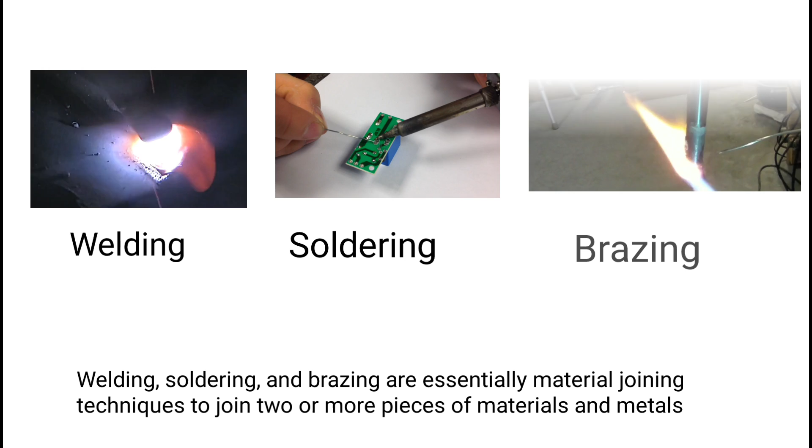To effectively join parts together, a welder will either solder, braze, or weld the two materials, which are processes that use heat. Welding, soldering, and brazing are essentially material joining techniques to join two or more pieces of materials and metals. They are also techniques used for filling gaps in metal parts. While these three methods have a lot in common, there are distinct differences that are important to know.

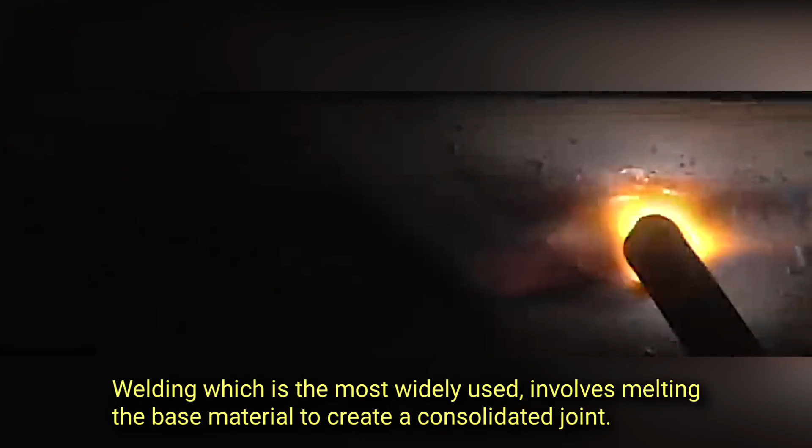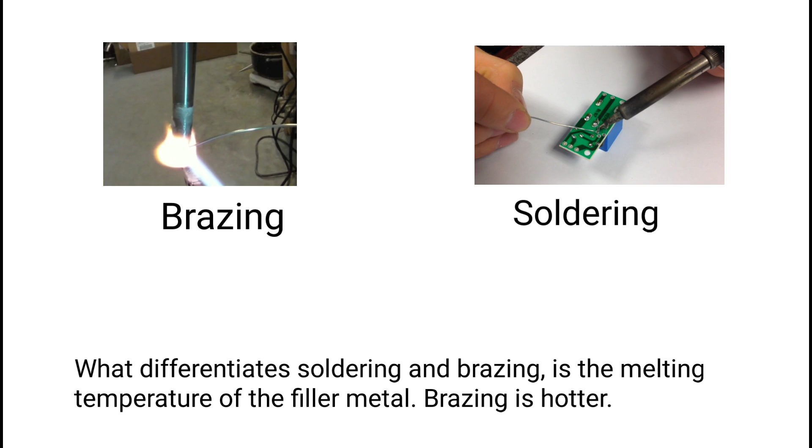Welding, which is the most widely used, involves melting of the base material to create a consolidated joint. It may or may not involve the use of filler metals or shielding gases. Brazing and soldering are almost the same, in that they both melt the filler metal, braze or solder, only, and not the base material. What differentiates soldering and brazing is the melting temperature of the filler metal. Brazing is hotter. These three joining techniques have their advantages and disadvantages from a processing and application perspective.

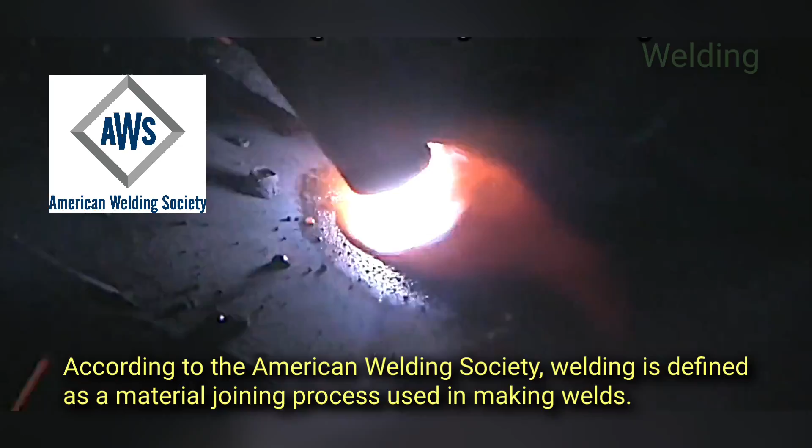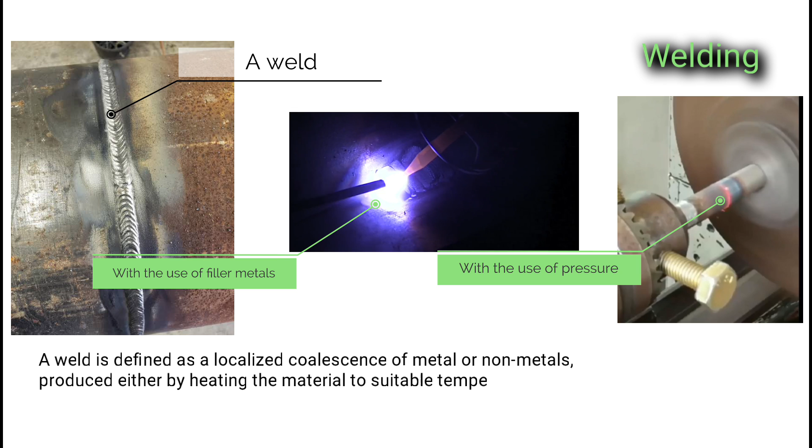Welding. According to the American Welding Society, welding is defined as a material joining process used in making welds. A weld is defined as a localized coalescence of metal or non-metal, produced either by heating the material to suitable temperatures, with or without application of pressure, and with or without the use of filler metals.

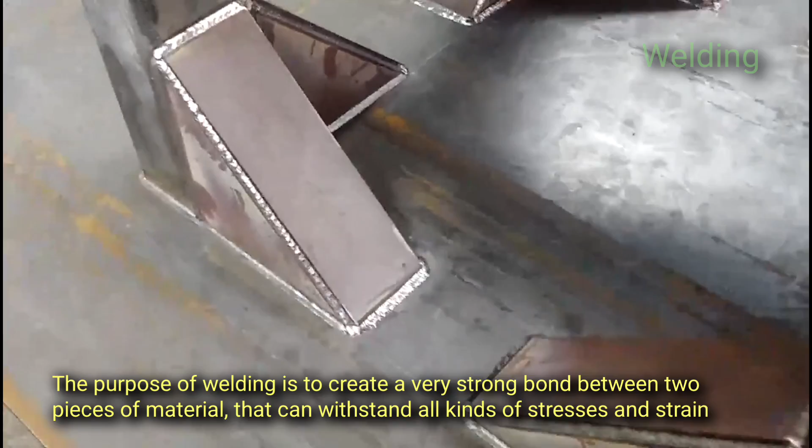The purpose of welding is to create a very strong bond between two pieces of material that can withstand all kinds of stresses and strains, such as supporting the body of a car or aircraft fuselage. Welded components are in use all around us in everyday life.

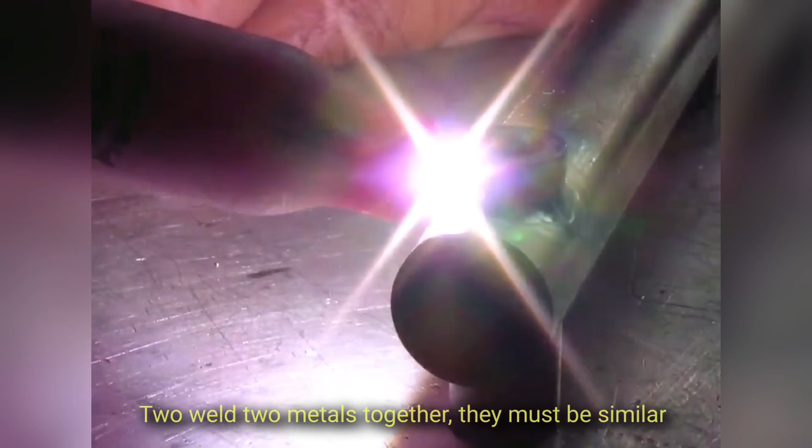To weld two metals together, they must be similar. For example, in most welding processes you cannot weld aluminum and steel together because of their different thermal expansion coefficient and melting point. The welding temperature must be high to join two pieces together, yet not too high, as this can change the characteristic of the metal and cause the weld to weaken.

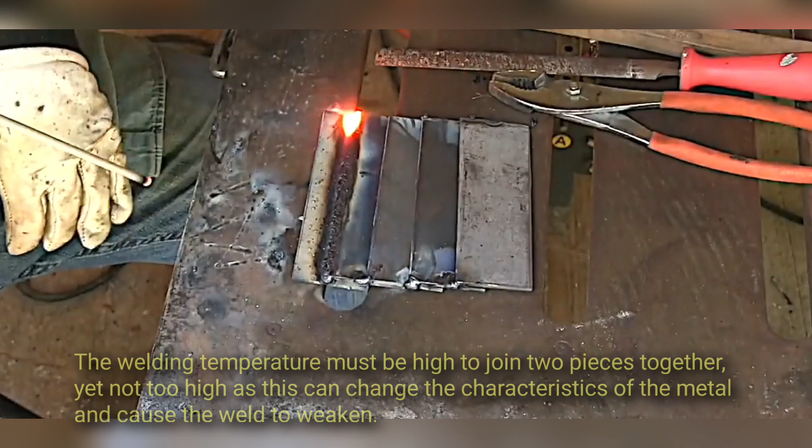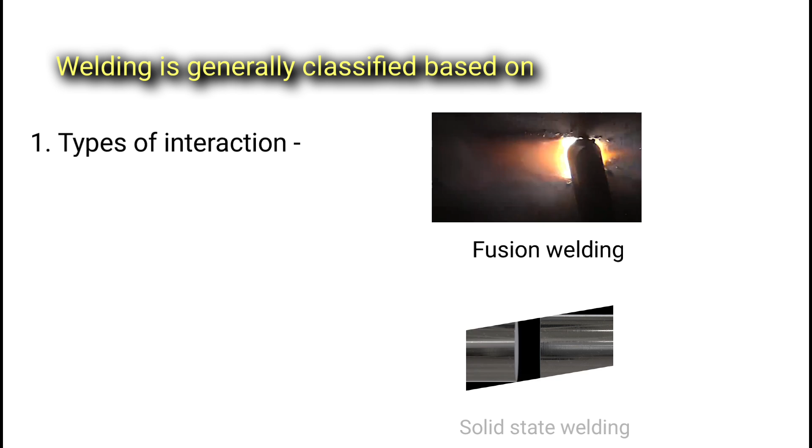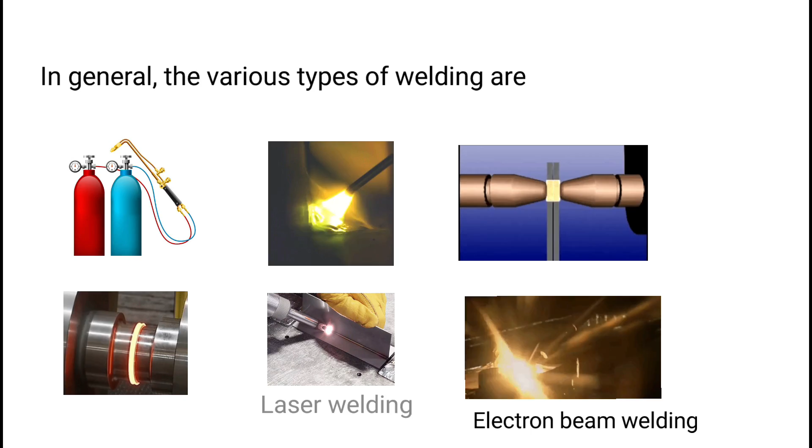There are different types of welding techniques to use depending on the material and the desired outcome. Welding is generally classified based on: 1. Types of interaction, that is, fusion welding or solid-state welding. 2. Source of heat, that is, oxyacetylene gases, lasers, electricity, etc. In general, the various types of welding are gas welding, arc welding, resistance welding, friction welding, laser welding, electron beam welding, etc.

Advantages of welding: 1. Produces stronger joints than brazing or soldering. 2. A good weld is as strong as the base material. 3. Able to join thin and thick sections of metal, depending on the process type.

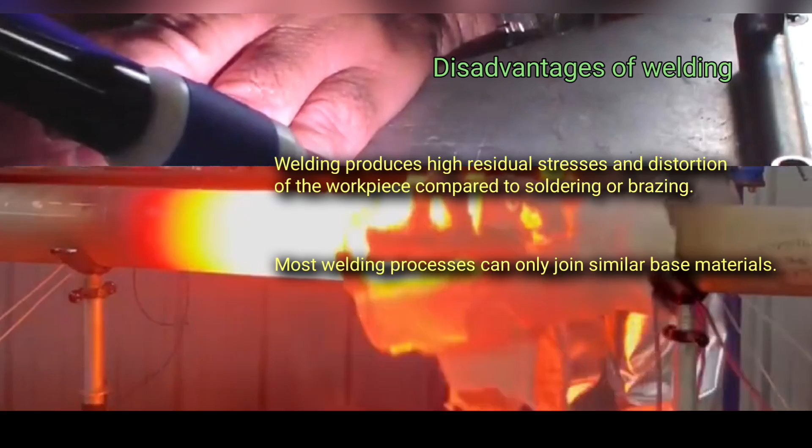Disadvantages of welding: 1. Welding produces high residual stresses and distortion of the workpiece compared to soldering or brazing. 2. Most welding processes can only join similar base materials. 3. Welding joint requires stress relief heat treatment.

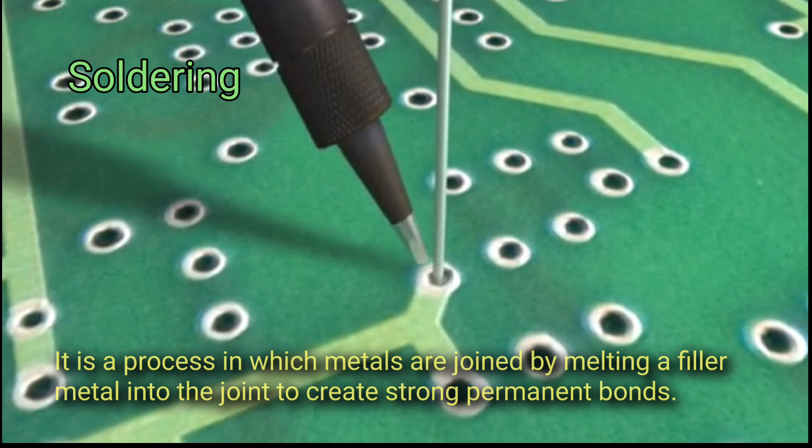Soldering. Soldering is one of the oldest and most popular methods used for joining similar or dissimilar materials. It is a process in which metals are joined by melting a filler metal into the joint to create strong permanent bonds. It is similar to brazing, which uses filler alloys, but it is done at a low temperature below 450 degrees Celsius. Like brazing, soldering uses flux to clean the metal surfaces, allowing easier flow of the liquid filler metal over the base materials, which improves its mechanical properties.

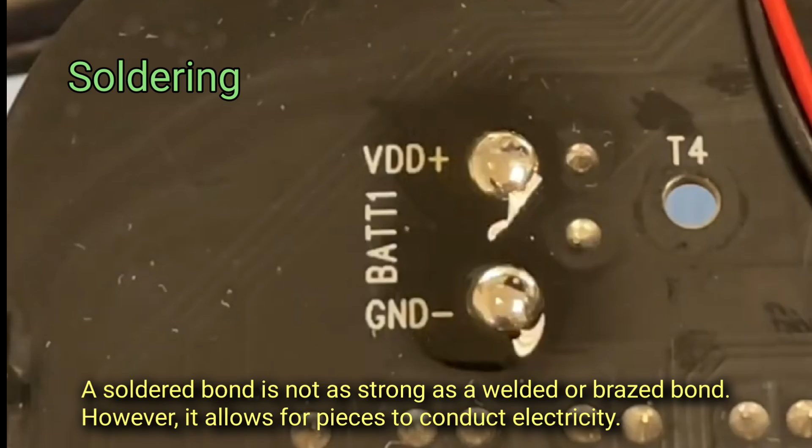Base materials that are suitable for joining by soldering include brass, copper, iron, gold, silver, etc. A soldered bond is not as strong as a welded or brazed bond. However, it allows for pieces to conduct electricity. Therefore, it is widely used in the electronic industry for making electrical connections, such as joining copper to printed circuit boards. Soldering alloys are usually identified by their major alloying element.

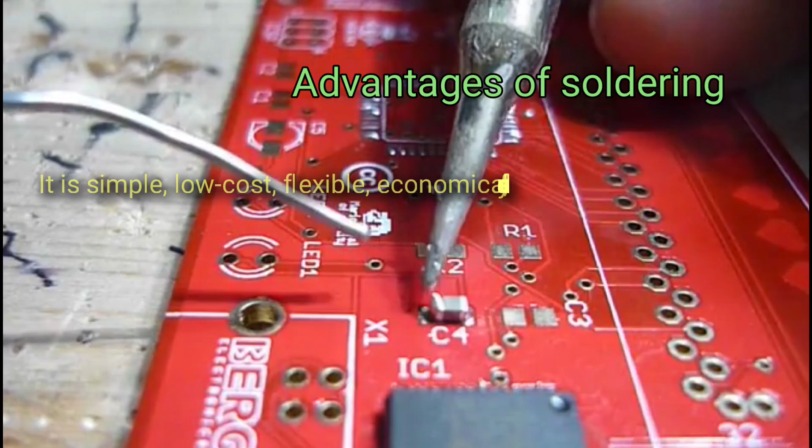Advantages of soldering: 1. It is simple, low cost, flexible, economical, and user-friendly. 2. Having a lower input and processing temperature compared to welding and brazing. 3. Dissimilar material can be joined.

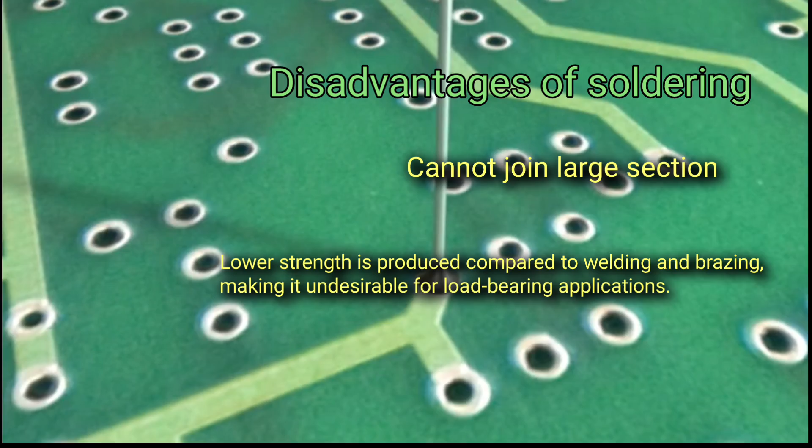Disadvantages of soldering: 1. Cannot join large sections. 2. Lower strength is produced compared to welding and brazing, making it undesirable for load-bearing applications. 3. High chances of the flux containing toxic components.

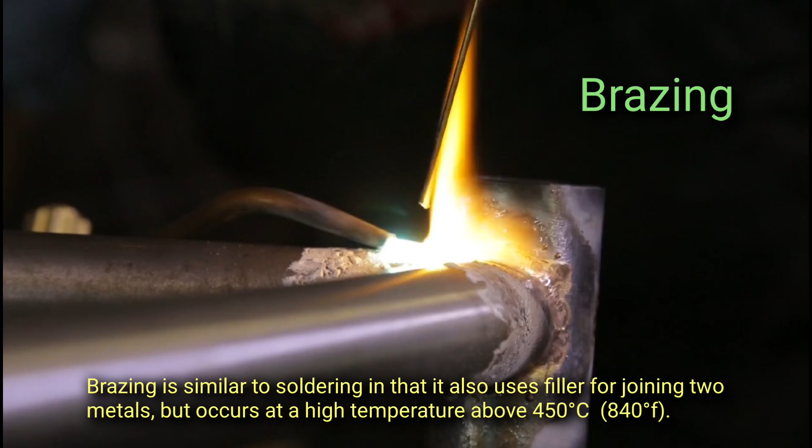Brazing. Brazing is similar to soldering in that it also uses filler for joining two metals, but occurs at a high temperature above 450 degrees Celsius. It is a process in which materials are joined by melting a filler metal into the joint to create strong permanent bonds. It can be applied to a wide variety of materials, including metals, ceramics, glasses, plastics, and composite materials.

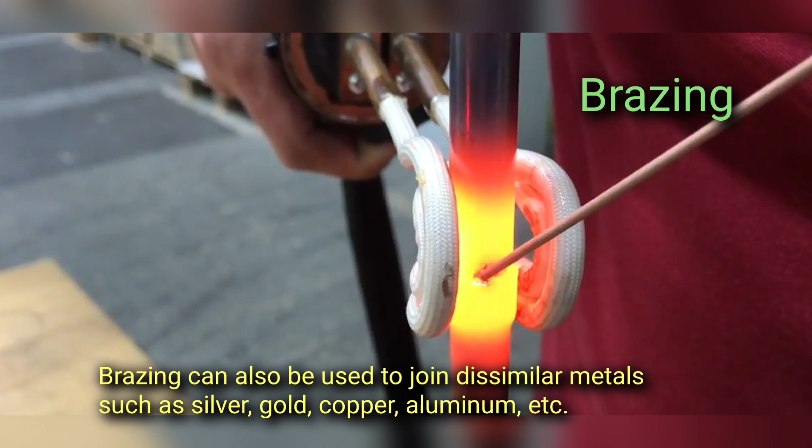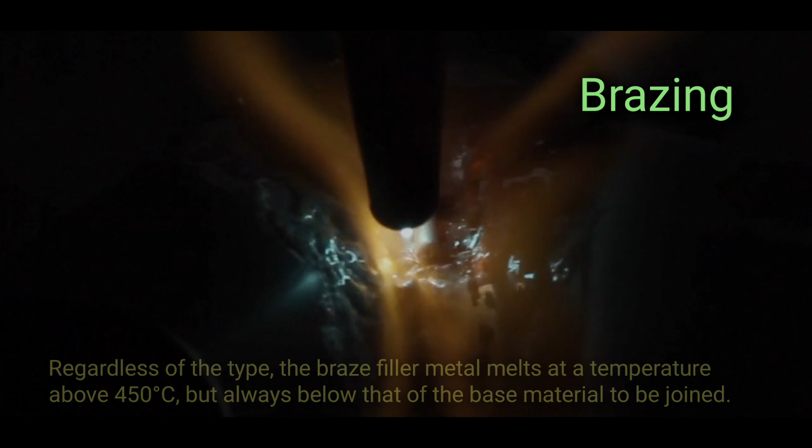Brazing can also be used to join dissimilar metals such as silver, gold, copper, aluminum, etc. Regardless of the type, the braze filler metal melts at a temperature above 450 degrees Celsius, but always below that of the base material to be joined. Brazing requires a small joint spacing to allow capillary actions to draw the filler metal into the joint when the parts reach the proper braze temperature above 450 degrees Celsius.

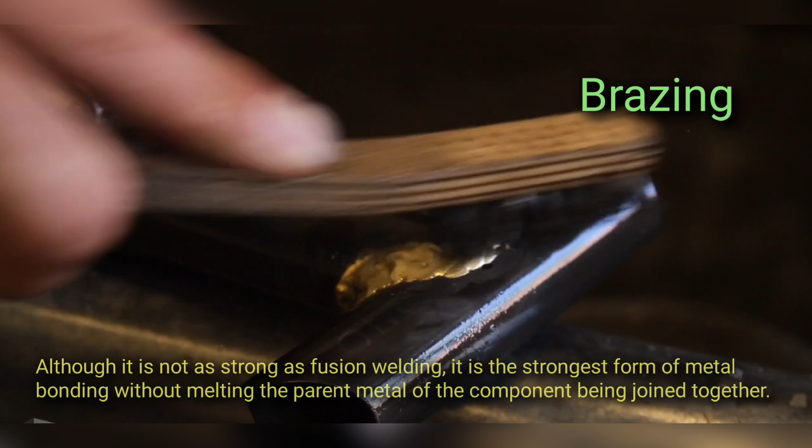Although it is not as strong as fusion welding, it is the strongest form of metal bonding without melting the parent metal of the component being joined together. As with soldering, the flux in brazing also helps to clean the metal surfaces and also helps to strengthen and improve its mechanical properties. There are several types of brazing, including torch or manual brazing, induction brazing, resistance brazing, and vacuum or furnace brazing.

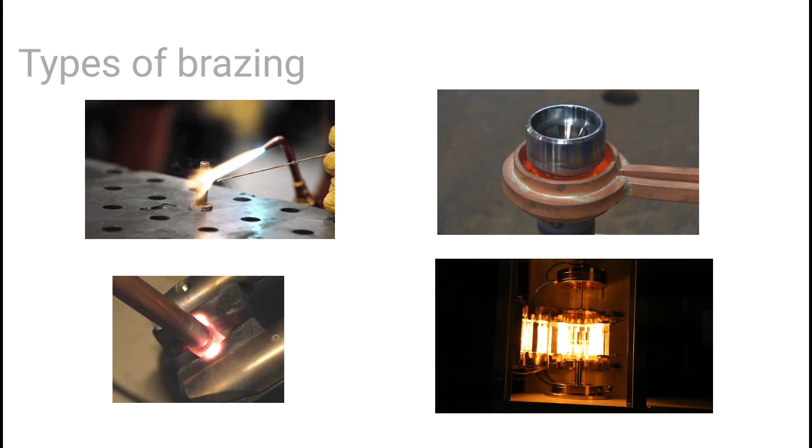Advantages of brazing: 1. Brazing can join dissimilar metals, which is impossible with welding. 2. Produces stronger joints than soldering. 3. Less likely to distort the joined metals compared to welding.

Disadvantages of brazing: 1. Weak joint as compared to welding. 2. The joints produced are not effective at higher temperatures. 3. Fluxes may contain toxic contaminants.

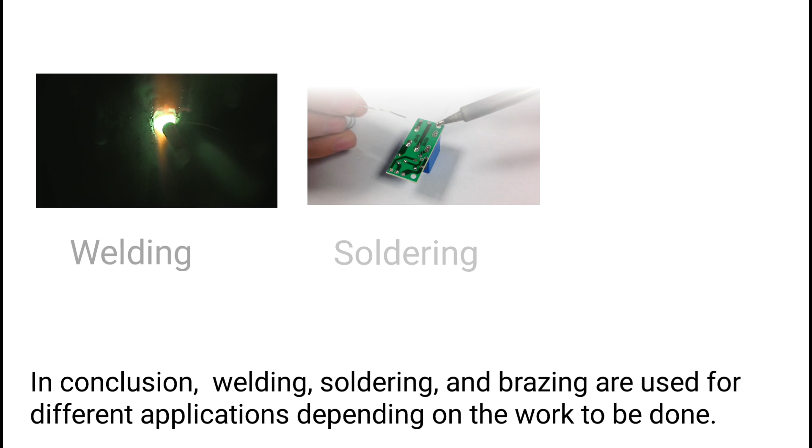In conclusion, welding, soldering, and brazing are used for different applications depending on the work to be done. One has to consider factors like metal type, desired strength, and ultimate purpose to determine the particular method to use.